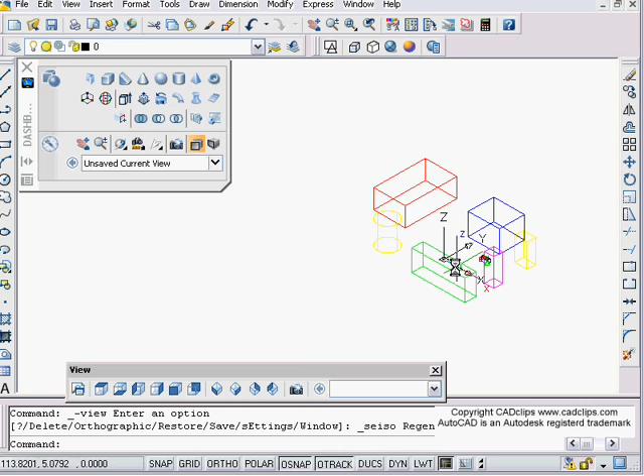And I've just got some prop objects in here as I usually do. I'm going to switch over to the conceptual view, for instance, and cameras are pretty easy. You just drop them in and look. The thing about a camera is it has a camera height and a target height, and then basically it looks in that direction, and we have clipping planes which we can turn on and off with our cameras.

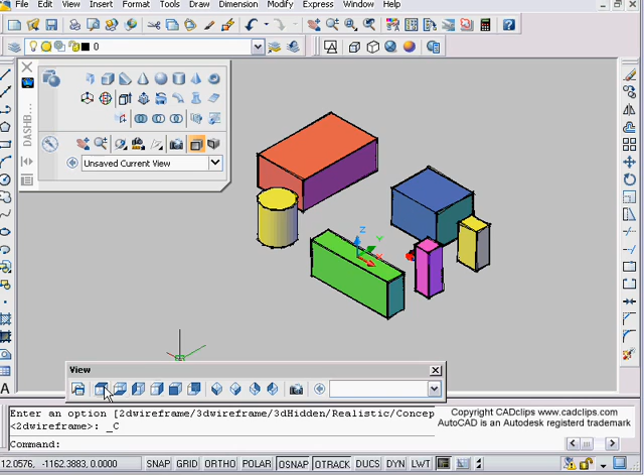And I usually find that setting myself to a plan view. Oh, I've got a camera in there. I'm going to delete that. And I find, place them in a plan view to start with. So I'm going to go in here and simply say camera. You'll notice that some of these have flyouts too here on the way. Camera. And then it says, okay, specify camera location.

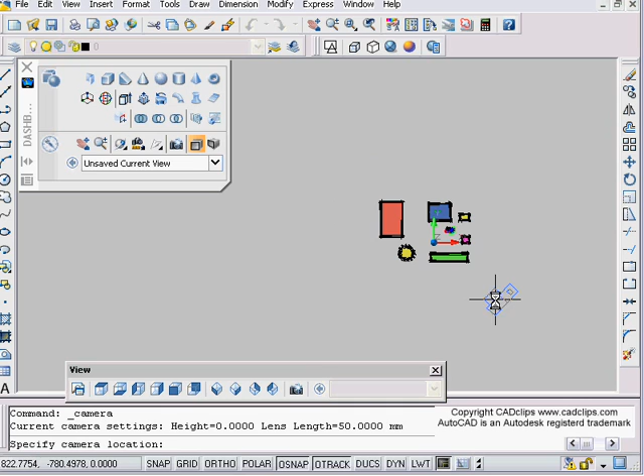And notice that when you place the camera, it always looks back towards 0, 0. You'll notice as I move this around, I'm going to move everything over to there. Okay, now my 0, 0 is here. Watch, when I place my camera, even though I'm going around these objects, it's always trying to look back at 0, 0, which isn't a big problem.

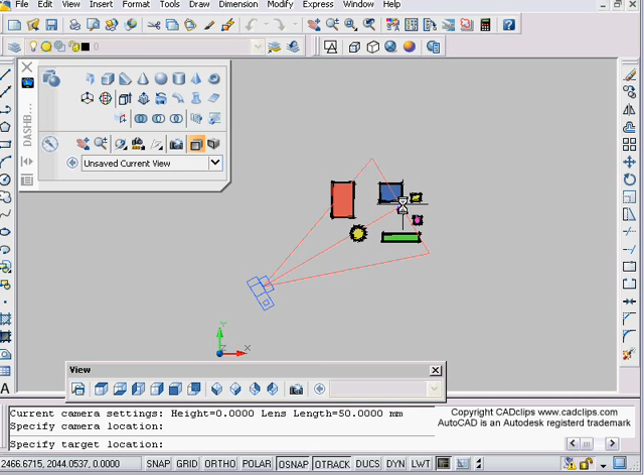Because we can still go over here and place our camera or place it here, and then we place the target. Now you have to be careful because when you use your object snaps, it'll pick up those endpoints and stuff like that. So be cognizant that it is picking up object snaps. So I'm going to just pick a point out here. And then it's going to leave me with some options inside of there, clipping planes, etc. And then I'm just going to hit enter.

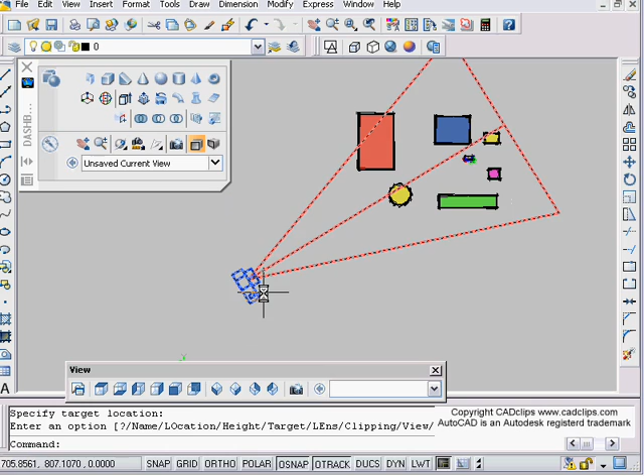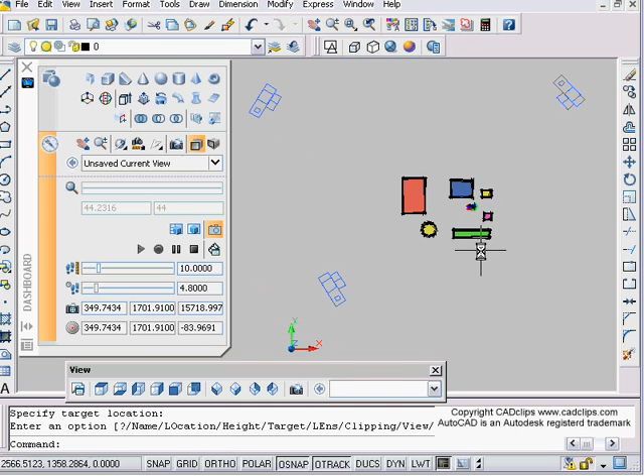Now I have that camera on there, and down in here, if I hit this expand button, you see some great stuff for recording animations and stuff. I can turn basically camera display on or off. So if I create a couple of different cameras around here, I can turn those cameras on and off. Then I can click on the camera and it shows me a preview, and I can have that show or not show in there, and I can also pick my display visual style that I want in there.

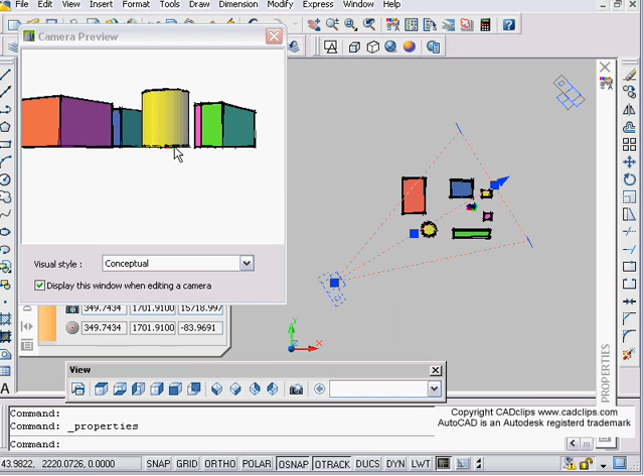The other thing is as you place cameras, it's creating views with names. You can click on a camera and you can check the properties of it. And it says, okay, this is camera 1. Now notice the camera Z and the target Z. That's why you're always kind of looking down from the ground.

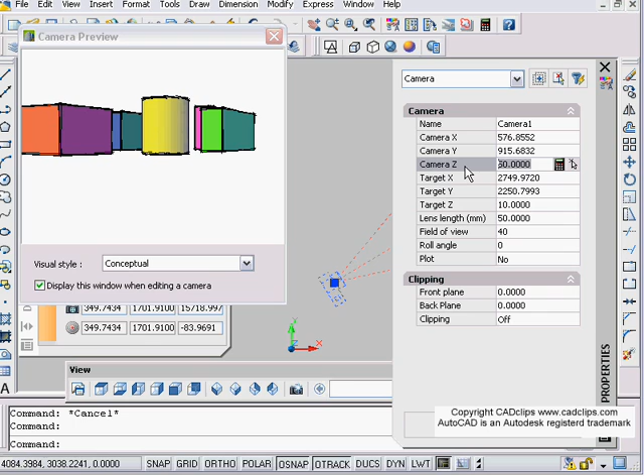So the first thing I usually do with a camera is click on it and check the properties, and I usually bump up, like maybe I'll take the target Z and I'll put it at 10 units high, and you'll have to know what units are relative. And my camera I'm going to put at maybe 50 units high, which kind of raises it up, and you can see the preview. So I'm going to go back and maybe I'll make that 500 units. You'll see that that angle changes.

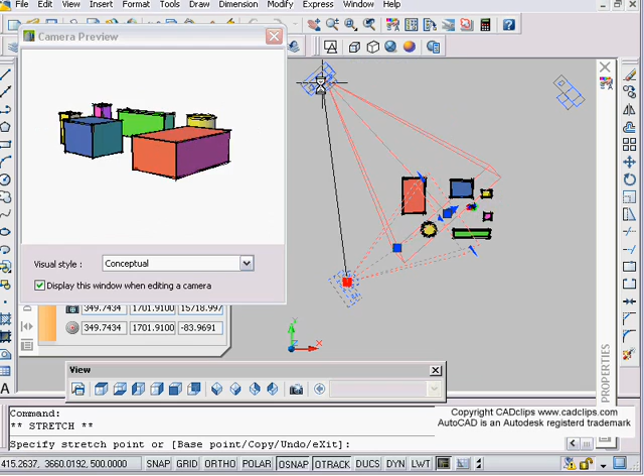Now as I go in here, I can click on this, and you can see the preview happening in the bird's eye. Well, maybe I want to take that, bring that target there, and then I can work my way around the objects over here. And you can see that quite nicely. You can get right inside, and depending on where your target is, depends on what you'll see when you get inside there. Okay, hit it.

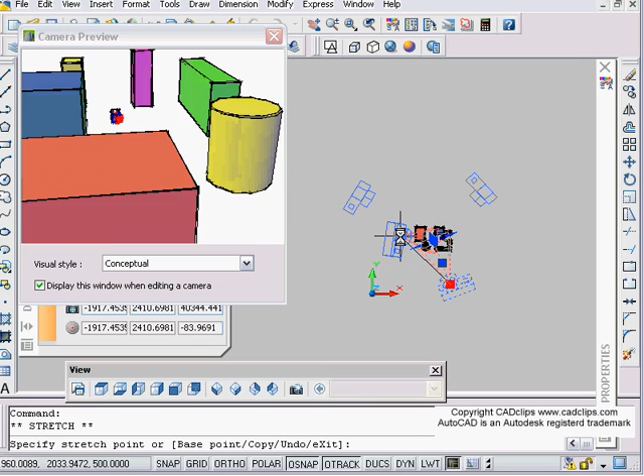And then I can even hit escape, do a regen, and then maybe zoom out and then click on here, and depending on how far you're zoomed out or zoomed in, you can have that picture in picture.

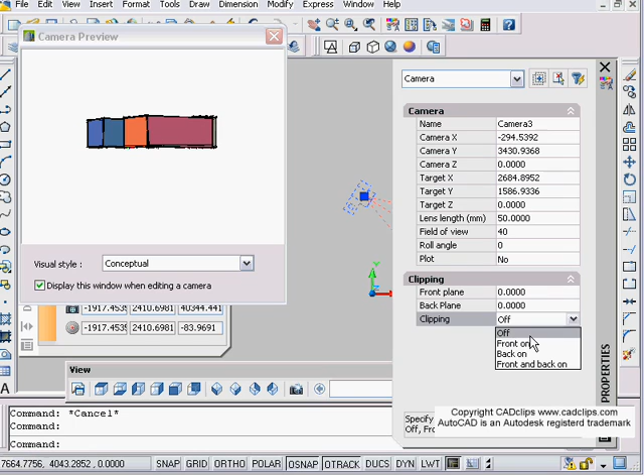You can also click on here again in properties, front clipping plane. You can put clipping right now by default. Notice how this one is going to be called camera. Oh, I have more than one selected. Properties, camera name is camera 3. Clipping on, maybe that one has the front and back clipping planes on.

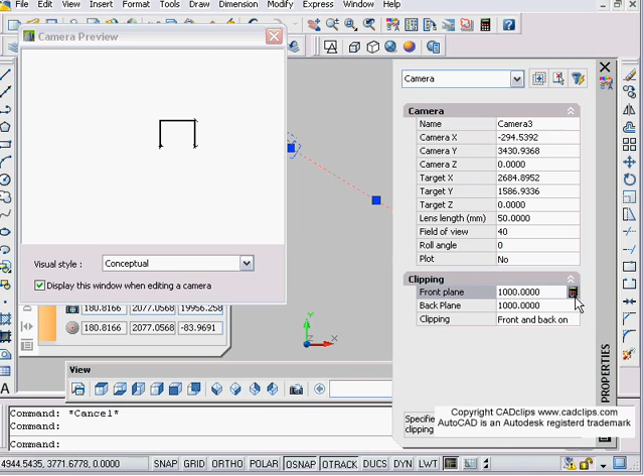So what happens there is we can click on that camera now, and we can set those clipping planes to be a certain distance away, by adding in some numbers, 500 and 1000. Okay, it'll capture part of that. You can go in and use your calculator as well. So you can add those clipping planes, and a front clipping plane is the front one, and then the back clipping plane is the back clipping plane.

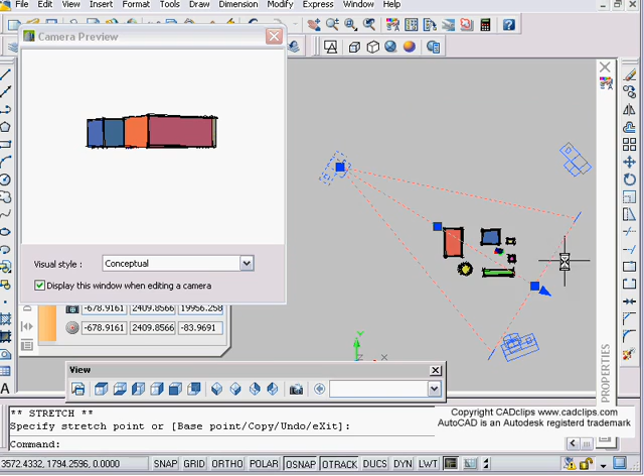You can control those through the properties or with grips if clipping is actually turned on. Most times clipping is turned off, so it's kind of ignored. Okay, we also have some grips over here. Lens length, if you want to narrow the scope of your lens as you're moving that around with your camera. Notice how this one still has a camera height of 0.

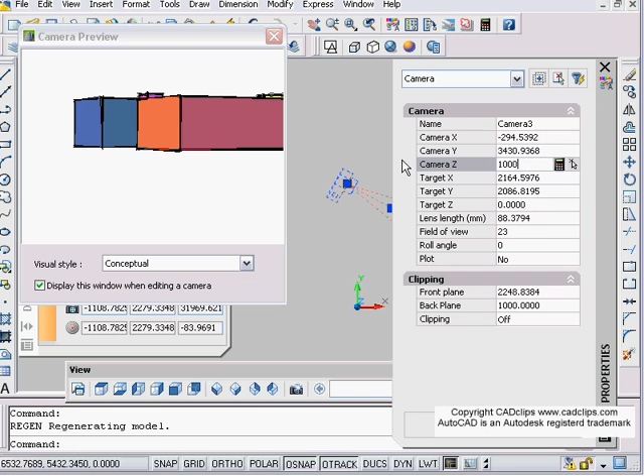Let's change that to be 500 again. Oops. Let's make it 1,000 units high. Okay, now I can move that around, etc. And those cameras also show up if you look in these type of views. You can see that camera again. You can kind of move that around, do stuff with it. The square grip actually moves the camera.

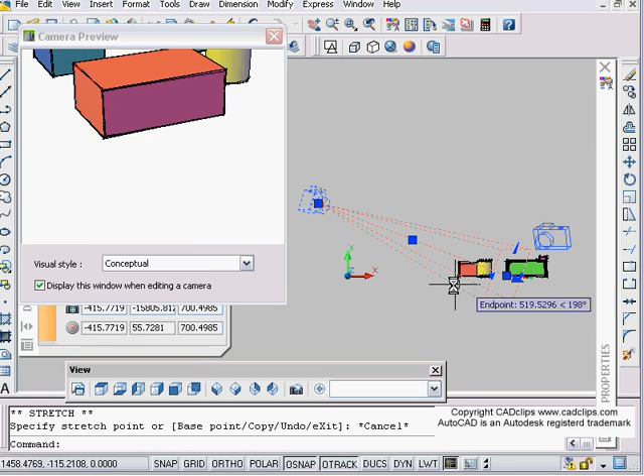These change the lens size by going in and out this way, and then this moves the target, the actual target. So get used to the different grips, and as you change your viewpoints here, you'll be able to see those cameras if they're actually turned on.

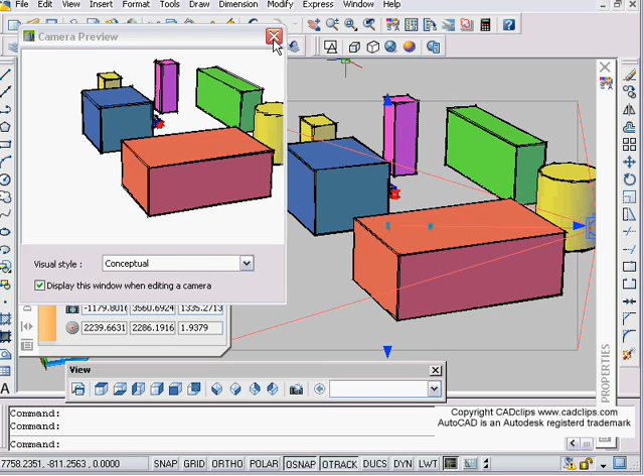So of course the idea is to get one of your cameras, and then, if we right click on that, we can say set camera view, and then it'll actually go to that view, and you don't maybe need this guy over here anymore. And when you do that, you can then go in and pick on these points again and change those options for that particular camera.

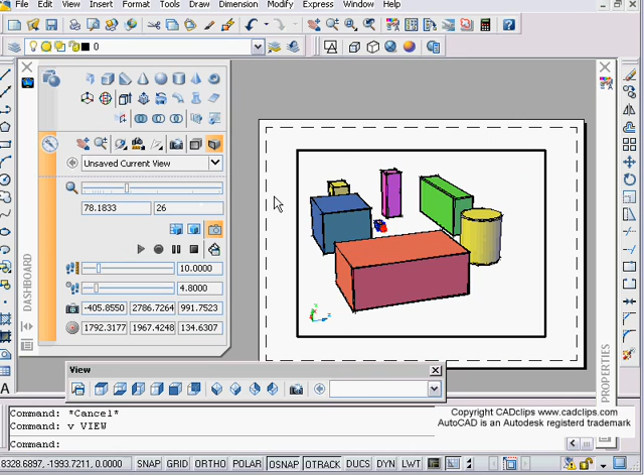As well, if you go into paper space, of course, and we make a viewport inside of here, we can type V for view, and you can say, I want this to be camera 2, or camera 3, or camera 1. So each viewport can have a different camera view. So we can zoom that down and go in there and do what we want with that.

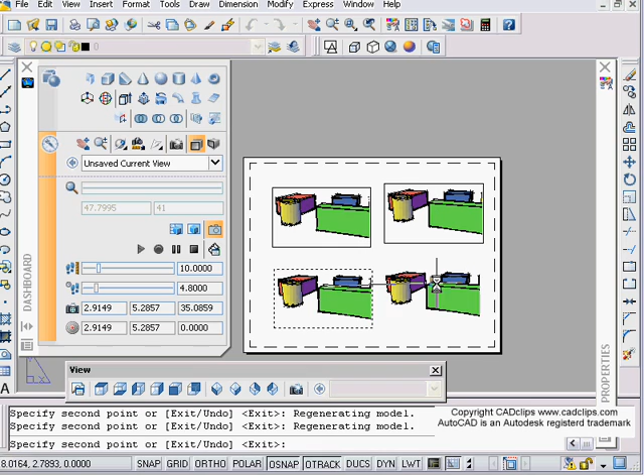And then we can maybe copy that viewport around, doesn't matter, in our paper space. And then the idea inside of here is we click in here and set that one to be camera 1, set this one to be camera 2, this one is camera 3, or we can set it to be whatever view we want.

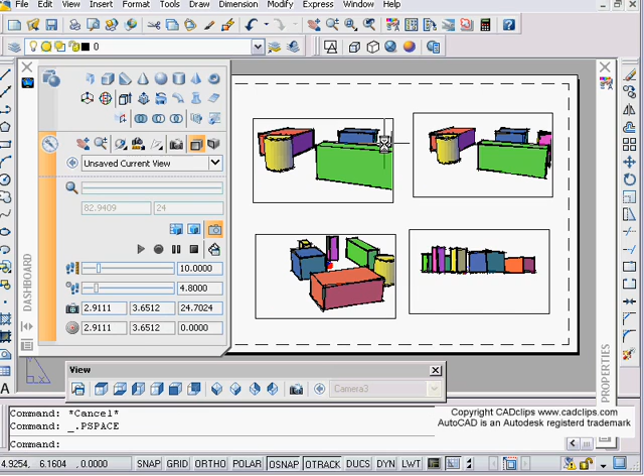So that's what we can do, and then we can name those cameras accordingly by going back into our paper space, as long as our cameras are turned on, and select that camera, and then check the properties, the name, X, Y, and Z. Mainly it's the Z's you want to be able to change inside of here. And it looks like it's being relative to the UCS or something inside of here. So try playing with these numbers.

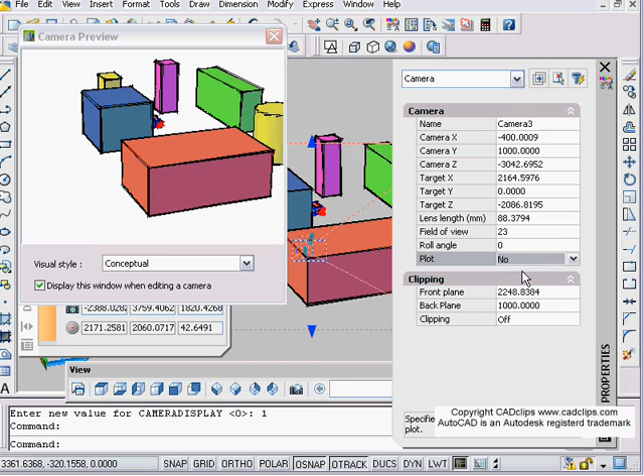A lot of this stuff also happens when you change these grips. You'll notice that these numbers in here start to change. It also appears there's a plot button, yes or no, so I would think that it would either be plotting the camera or not plotting the camera, and we'll see some more stuff with animation, etc. in the near future. So there's just a couple of tips on getting cameras in.

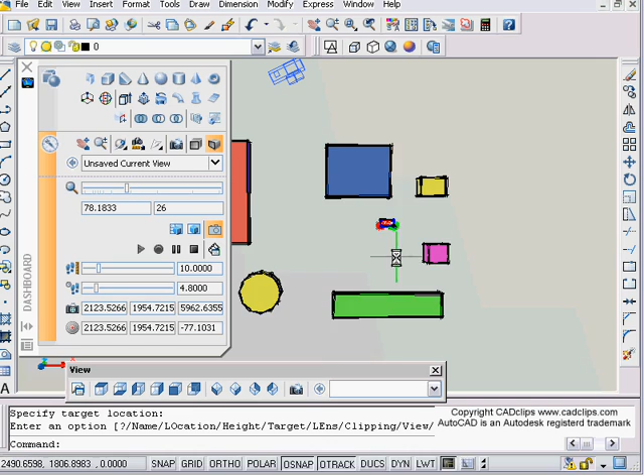Pretty straightforward. Pick the camera tool, pick a point, place it, and then have a look maybe at the help menu and set some more options. Basically, I just place it, and then after you set it, notice your Z, change your Zs, etc.

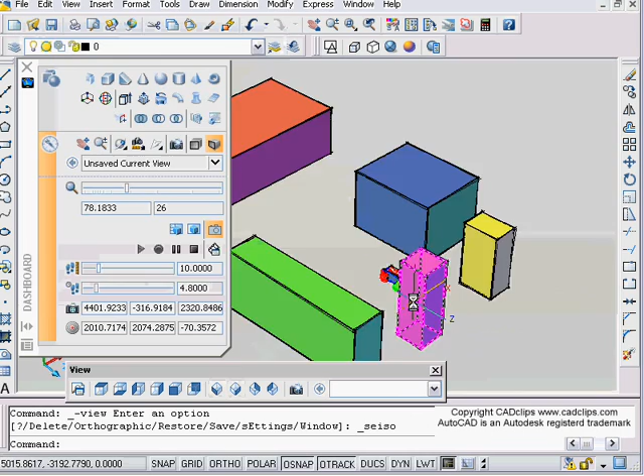You could also move the camera just by going into, for instance, my right hand side view, and I can grab that camera and move it up just by going into that view. Going back to my 3D view, click in here, so off you go. So put your cameras in and then rename the views, and then take those views and put them in paper space and plot them out.